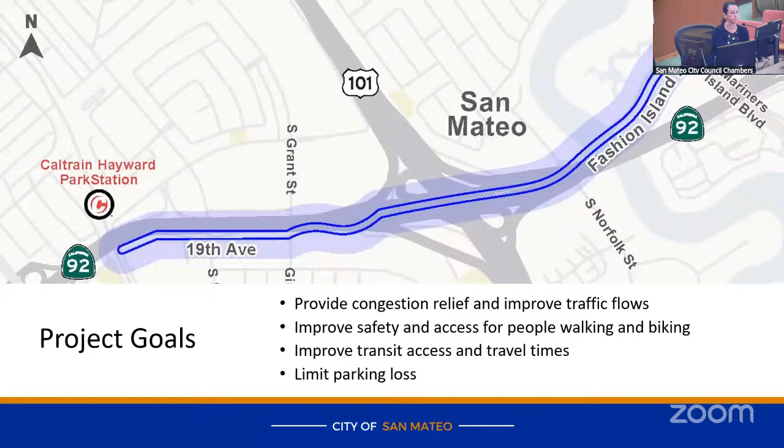For some of the project background, this project started around 2023. It was branded as the 101-92 Mobility Hub and Smart Corridor Plan. This included a Caltrans lot at the intersection of 19th Avenue and Fashion Island Boulevard, as well as this corridor. In that, we also included 3 pop-up events. We had a community meeting that collected feedback on these proposed design concepts. They were concepts at that time and more high level.

And so where we're at now is getting into the actual construction designs, getting into more detail. Again, during that time, there was an existing conditions assessment, and we had an opportunity to get feedback from the community on how to narrow this scope and how to build what scope we're looking at right now.

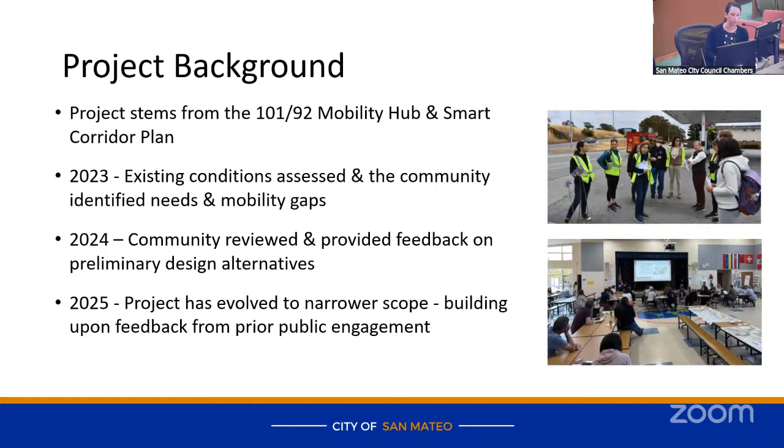I wanted to talk through really briefly some of the 2040 general plan policies and actions. This is a lot of text, we're not going to go through it all, but I do want to note that there are a lot of policies and actions in the general plan that support the type of project that we're proposing here. So the first one, about sustainable transportation, this is the very first goal in the circulation element, which is to reduce vehicle miles traveled and greenhouse gases by increasing mode share options for sustainable travel modes such as walking, biking, and public transit. There's also an additional policy to apply complete street standards.

So this is a similar vein where you're looking to increase modes when we're doing any sort of projects. Vision Zero is a policy in which we're looking to improve safety and eliminate fatal and severe injury collisions. As far as prioritizing bike and pedestrian needs, again, we're looking to prioritize that in these kinds of projects to increase connectivity and safety. And then not just about bike and ped projects, but we are looking to also maintain a transportation network here in policy C 6.2 that will accommodate future growth, reduce VMT, and equitably implement complete streets. So this is really pertaining to all modes, not just bikes, peds.

And then lastly, pertaining to transit, provide projects that will increase access to transit.

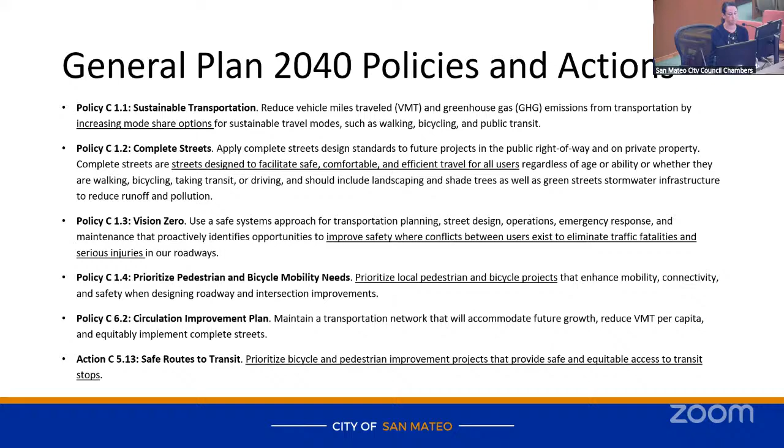We're also looking at how this project aligns with City Council priorities. In the 25-26 City Council priorities, we see alignment with this project with priority number 28, 39, and 40. 28 and 40 are largely related to the bike and ped implementation component of this project, and then 39 is related to the congestion relief component of the project.

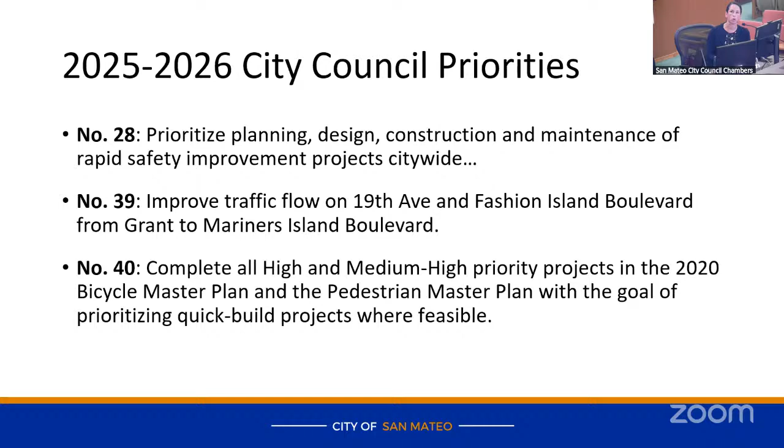Diving into some of the corridor safety data, we took a look at data from 2019 to 2024. In that, we've identified that there have been 200 collisions along this corridor, spanning all the way from Pacific to Mariners Island. 50 of those collisions, as we'll talk about in just a minute, were at the Fashion Island and Norfolk intersection. 74 of them were at the 19th Avenue and Delaware intersection.

In this corridor, there were 3 pedestrian collisions, 3 bike collisions during this timeline. I do also want to note that there was a relatively recent pedestrian fatality on this corridor as well. It's not included in this data set, but it is one that we wanted to make note of.

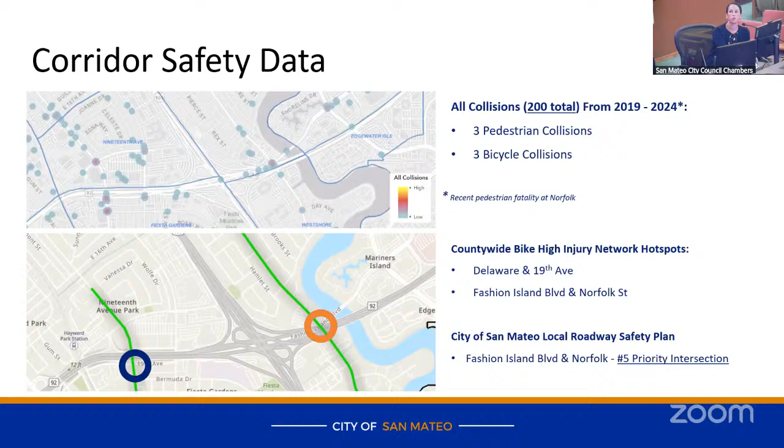Also on the corridor, countywide bike high injury network hotspots were identified at both intersections of Delaware and 19th, and Fashion Island and Norfolk. Those are the 2 that I just mentioned, having the highest amount of collisions on the corridor. And then in our own local roadway safety plan, Fashion Island and Norfolk is identified as the number 5 top priority intersection for us to address safety concerns.

Looking again at some additional data sources, the C/CAG Safe Routes to School speed analysis has identified that this corridor has reported speeding of 6 to 10 miles per hour over the posted speed limit, which poses concerns for the safety of other users along the roadway, as well as this being a corridor identified on the youth-based high injury network in a similar document.

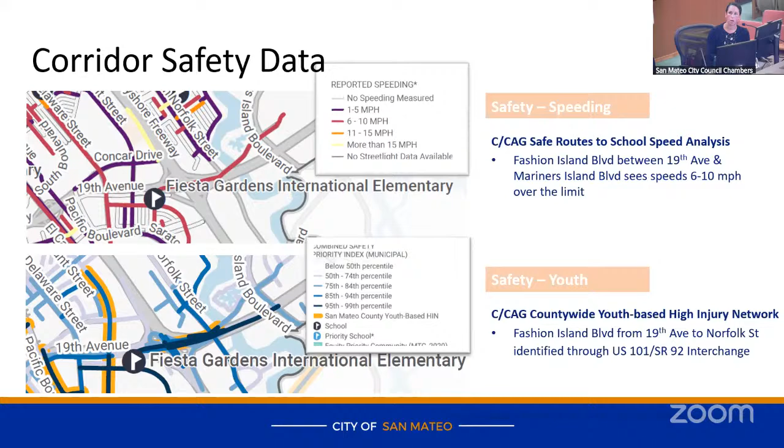Jumping broadly to the roadway network context of this corridor in relation to the entire city. The gray outline is the boundary of the city, and we're a little zoomed in from here. The yellow lines represent roadways that cross US 101. What I'm trying to identify here is the barrier that 101 has created in the community, which is probably well understood. We have 4 crossings that provide access to all modes, so vehicles, bikes, and pedestrians are able to cross 101 at these yellow points.

We also have one green crossing, which is a bike-ped bridge just north of the 3rd Avenue crossing, the Monte Diablo Bridge. And here we have Fashion Island Boulevard as this second, more southerly crossing. What we see is that it's over 1.5 miles away from the next one to the north, so it's really identified as the longest distance between crossings in the city on this northerly side, between 3rd Avenue and Fashion Island Boulevard.

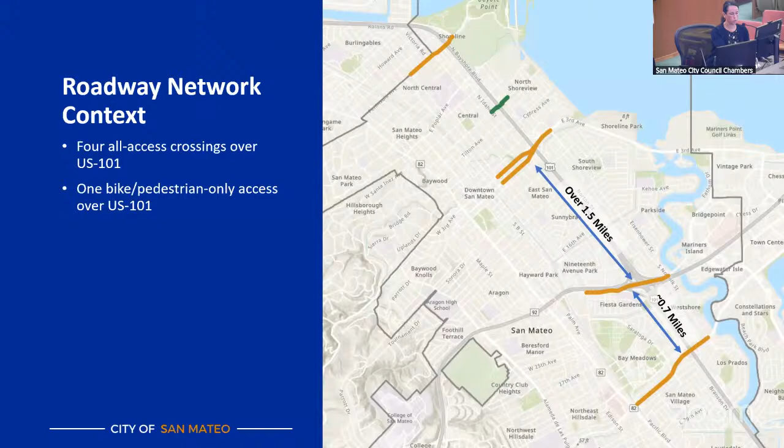To the south, it's about three-quarters of a mile, or a little less, still a decent distance. So really what this means is that these crossings become very important locations for us to focus our energy, making sure that we are accommodating all uses as best and as safely as we can, to get people across this divide.

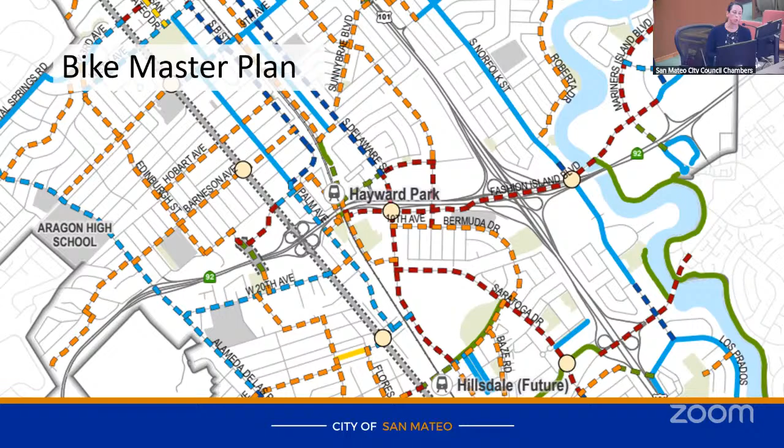So for that reason, we'll come to the bike master plan, because the bike component is a big component of this project. You'll see that the corridor I've highlighted is proposed as a separated bike lane, the highest level of protection of an on-street facility that can be proposed. Going back to that map we were just looking at, there's a reason for this: we want to make sure that these limited connections are protected and safe.

Just to make sure we're on the same page about what a separated facility is: a conventional bike lane is shown on the left. You can see there's a stripe, but no separation, so bicyclists are riding right adjacent to vehicle traffic. Typically this is acceptable on lower volume roadways, but on higher volume or higher stress roadways, a separated bike lane, shown on the right, provides some sort of vertical separation, a physical barrier between vehicles and bicyclists, enhancing the safety of that facility.

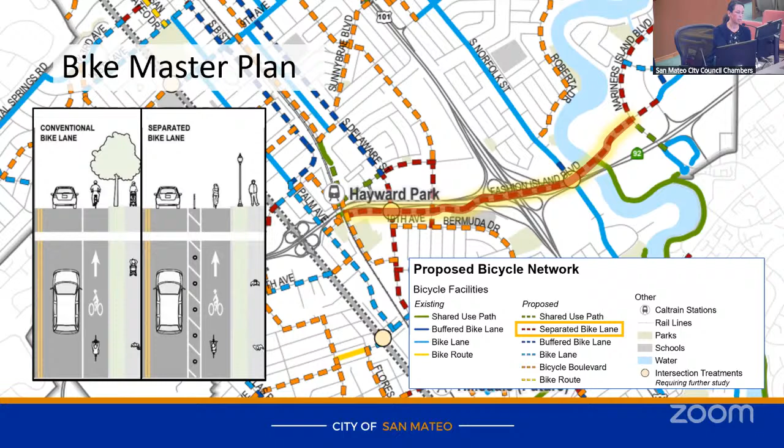We'll dive into some challenges along the corridor now as well. We're going to talk about some congestion, as well as the 92 ramps at Delaware. Both of these are topics we'll want to discuss at the end.

For corridor congestion, you may be familiar with this image, a snapshot from Google Maps of the 101-92 interchange, shown in bright red. This is traffic at 5 p.m. on a Wednesday, just a snapshot of what this looks like. We're familiar with this, as we know there's a lot of traffic headed eastbound in the afternoon. We see an inverse of this in the morning, but it's not as drastic.

One of the challenges with this corridor, even though it's hard to make out, is that it runs directly parallel to this interchange. So as people look to get through the traffic in this area, it's common for them to look for alternative routes. Being a parallel route, directly parallel, it's very enticing and gets used a lot. So this is a corridor we're well familiar with that has a lot of congestion, and this goes back to the City Council priority of wanting to see how we can address this.

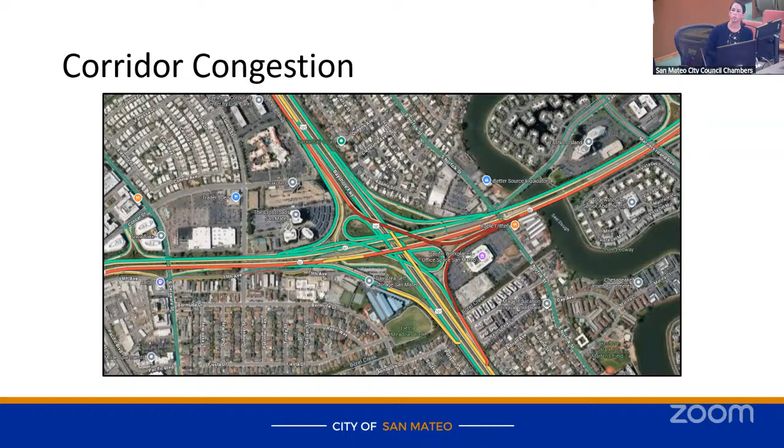So that was the qualitative review of that. Quantitatively, we wanted to bring some information about a metric we're using to address corridor-wide congestion, not just at a single intersection. What we're looking at here is vehicle hours of delay, which is the combination during this time period of how much time vehicles are not moving at free flow speeds, how much total time all vehicles on the corridor are sitting in traffic.

What we see on the corridor is broken up by different peaks during the day, and by direction. In the westbound direction, we see a relatively straight line of vehicle hours of delay throughout the entire day: 9 hours in the morning, 9 hours in the midday peak, and it jumps a little bit in the afternoon peak.

When we go to the eastbound direction, that changes a little bit. It starts at 9 hours in the morning as well, but by midday it's jumped up about 50% to 14 hours, and by the afternoon peak it's jumped over 200% to 32 vehicle hours of delay. This is every single day, 32 hours of delay of all the vehicles just waiting in traffic in this area.

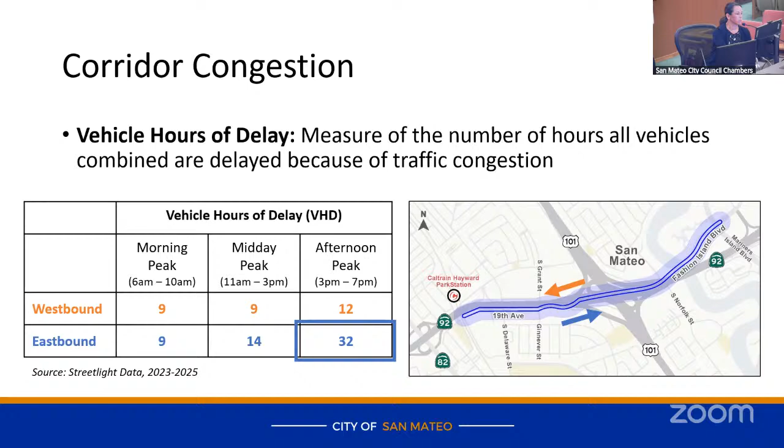Moving on to the Delaware intersection, this is again one that we're very familiar with. There's a lot of interesting movements here. This particular movement, the two ramp configuration between SR92 off-ramp and 19th Avenue, while it looks fairly benign, it actually presents a lot of challenges.

It creates some challenges in the way you would typically design an intersection. In this case, we need to design our intersections to accommodate two different right turns from one travel lane. We need to do the same thing southbound, two different left turns from one travel lane.

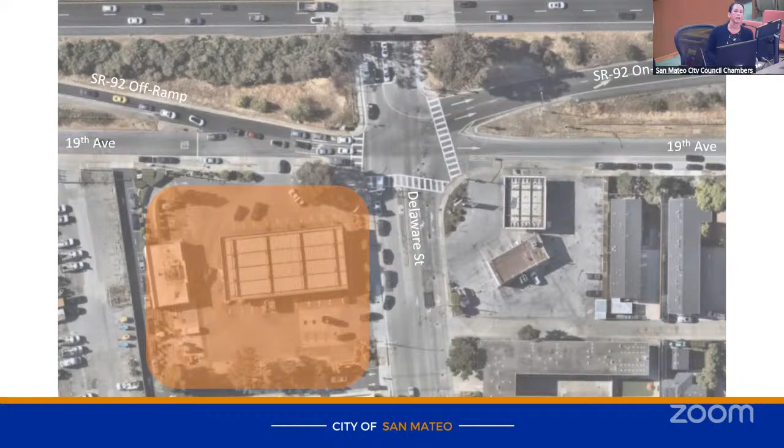We also have challenges, which we may be familiar with, from this particular gas station. This is one of the best gas stations on the peninsula, some of the best prices, great access, and it shows. We have a lot of traffic that comes in and out of this gas station, and unfortunately it's also been identified as one of the highest concerns from the community.

In this area, we know we already have vehicles coming from different areas: 19th Avenue traffic, which is relatively low volume, and the 92 off-ramp traffic, relatively high volume. Then we get into the gas station traffic, and we have these two movements occurring right in this area.

We also have challenges here on Delaware, similar issues with our typical north-south traffic, plus traffic coming in and out. We also have right turners here, but the real challenge is left turning vehicles coming out of the gas station trying to fit into an already relatively short and busy area of people turning onto the freeway or onto 19th Avenue.

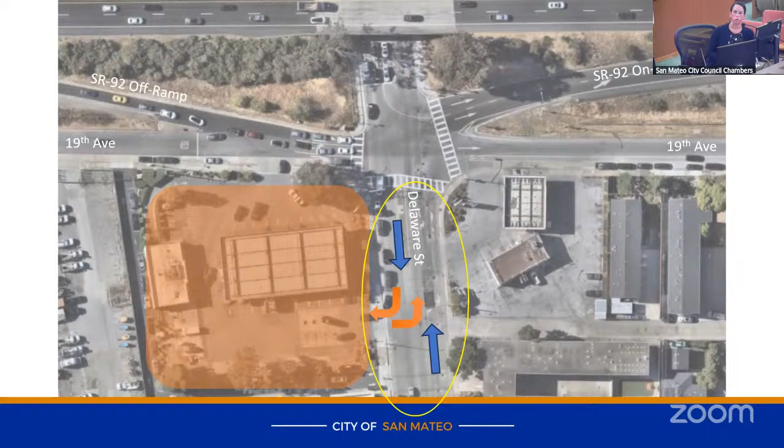All right, so we're going to jump from there right into the concept design. I'll point out a few things we're proposing to remedy some of these challenges. We're going to start at the west side of the project, at Pacific Boulevard. You'll see the tracks on the very left side, and just north of here is the Hayward Park Caltrain station, so these are the Caltrain tracks. We're starting this side of the project because we're looking to establish connectivity to the Caltrain station, and transit generally, as noted in some of the general plan priorities.

So in this, what you'll see on the bottom side, on the southerly side of 19th Avenue, is the new bike facilities that are being proposed.

You'll note that this is a little bit different than typical bike facilities. These are two-way bike facilities, and the primary reason for this is to keep westbound bike traffic away from the freeway ramps, which are a really big concern in this area. This was proposed to help alleviate that challenge. It's not atypical, just a different configuration, not as common as your typical one-way facilities.

We're also proposing to widen the roadway. It's not very obvious in this slide, but on the northerly side you can see some white lines marking the existing curb line, and we're looking to widen out so that we can maintain as much parking as possible through this area. We are going to lose a handful of spaces. There's an existing 37 parking spaces here, and through this design we're looking to maintain 28 of them, accommodated by widening the roadway.

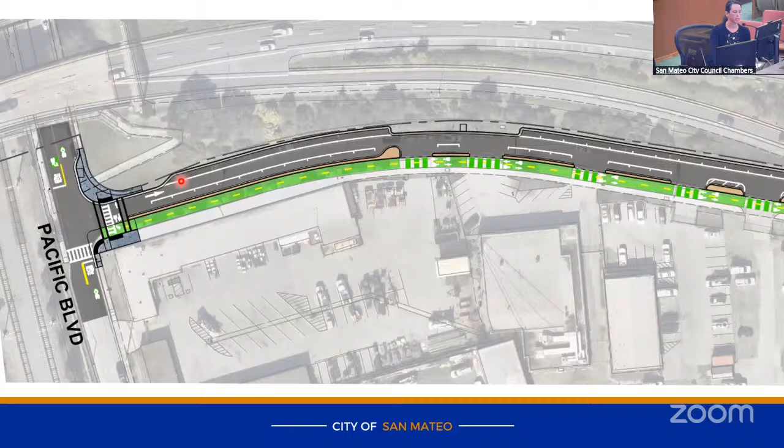There's a section here that's actually used for Samtrans bus layovers, and we're looking to maintain that. We're working with Samtrans to make sure that facility accommodates it.

Moving on to Delaware, this is that big intersection, and you'll see we don't have a lot of detail here yet. The primary reason is that this is an early design, about 35% design, still relatively concept level. We'd heard qualitatively from the community that there were a lot of challenges with the gas station intersection, so rather than diving into what we think is best, we wanted to hear from the community and confirm what we were hearing generally, that this is a concern.

When we got feedback from our online survey, this driveway on 19th Avenue in particular was listed as the top concern out of 5 or 6 different options we had given. One thing I want to point out is the primary solution we're proposing for the 19th Avenue portion is this proposed new median, which we're looking to extend from the off-ramp all the way out towards the intersection. You can see that here.

We anticipate that this will help alleviate some of the challenges in this area, specifically the safety-related challenges tied to the congestion or collisions happening here. We are anticipating still being able to provide the same amount and type of movements that are currently allowed at the intersection as it is today.

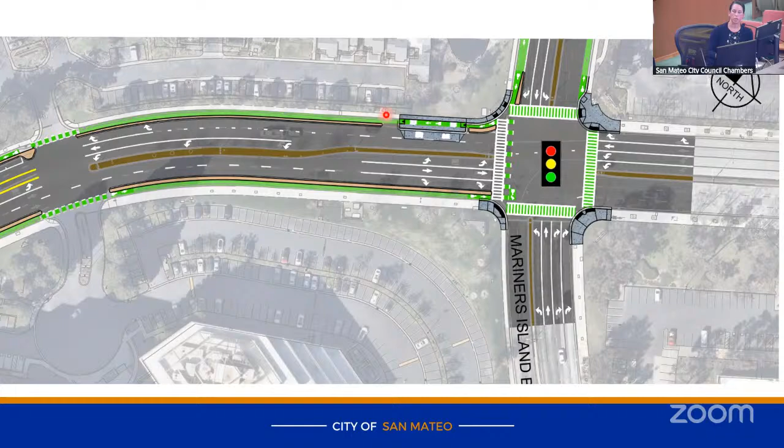They're a relatively new treatment, not something we've used here in the city, but we've seen it in other places in the Bay Area. One of the other things we're incorporating in this project is a new bus loading island. There's a bus pad out here for people to load, the bike lanes go behind the bus pad, and the buses can stop in lane here.

All right, moving on to outreach.

We also used social media platforms, and we put out A-frames, those construction-style frames, along the corridor and at community areas. We put them at Trader Joe's, the Hayward Park Caltrain Station, Fiesta Meadows, and other places where we knew the community who typically uses this corridor would see them.

In terms of participation, we had about 50 attendees at the community workshop, and over 150 responses on the online survey, which ran for about a month.

Going through a few interesting pieces from the outreach, I wanted to share an interesting parallel between the online survey and the workshop. Most people identified that the primary trips they're taking are short trips, and you can see that the blue and orange, representing online survey versus workshop, are largely the same all the way through.

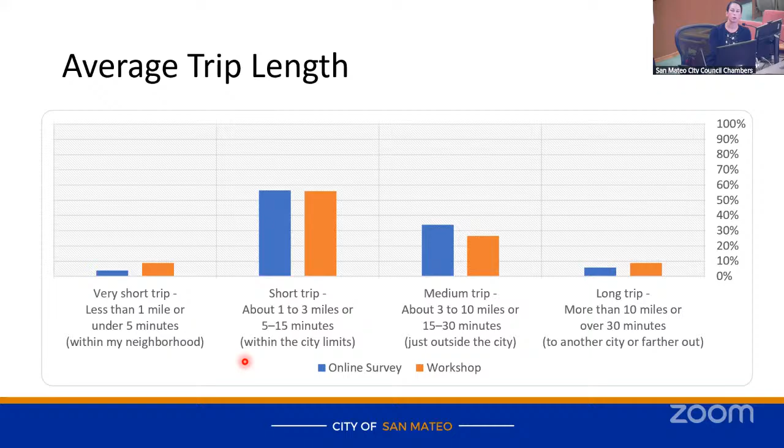There's also these medium trips, 3 to 10 miles or 15 to 30 minutes. The main reason I wanted to note this is because these numbers, the 1 to 3 miles or 3 to 10 miles, tend to align with the higher propensity trips to shift to other modes. These short trips are really prone to using something like a bike, showing an opportunity to shift the highest amount of trips if we improve the bike facilities through here.

During the workshop, we also heard a lot of really strong support for the various improvements we're proposing, including the sidewalk gap closure. There's currently about a 2-foot sidewalk on the south side of the Seal Slough Bridge, so providing a widened sidewalk on that southerly side was something that would be welcome. The protected intersections and protected lanes also tend to receive very good feedback.

There was definitely some concern about the one-way versus two-way transition - that's the one I talked to you guys about at the YMCA parking lot, that we're considering moving down to Grant. The traffic flow and congestion was definitely something we heard a lot about.

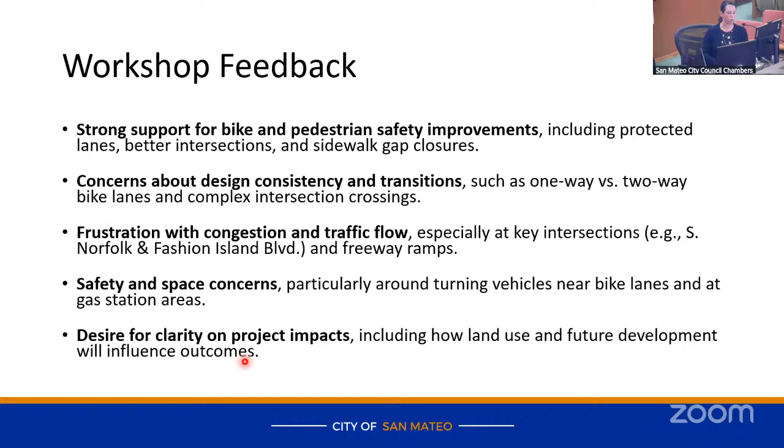The purpose of this first community meeting was to talk about the concept designs. We didn't have the traffic analysis just yet, so we'll be talking about that at the next one. We also want to make sure other future developments in the area are included in any of the analysis moving forward, which they will be.

We also received pretty decent support for the switch to 2 eastbound lanes and 1 westbound lane across the bridge. A lot of that was primarily neutral - it didn't seem like people had a strong decision either way, but where we did get support, it tended to outweigh anything that opposed it.

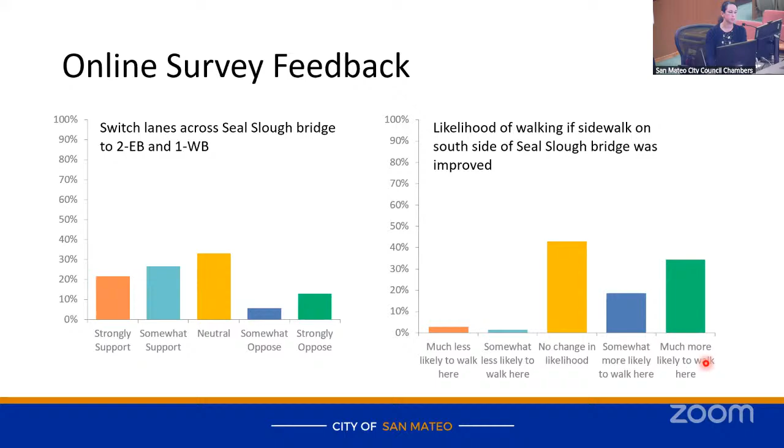We also asked about any increase in propensity to walk if we were to improve that south side sidewalk, and we do see that a lot of respondents said they were much more likely to walk here if that sidewalk was improved.

Moving on, I wanted to talk about the funding strategy for this project. One of the challenges with this type of project, primarily the congestion relief components, is that there aren't a lot of funding opportunities these days for congestion relief projects. Big dollar congestion relief projects tend to be in the form of freeway congestion relief - you're not really finding a lot of funding opportunities for local roadway congestion relief projects.

When we're looking at how to fund a project like this, we need to look at where the dollars actually are. The dollars are actually in complete streets projects, safety projects, bike and ped projects. As we've been looking through this corridor, we do have an ability to improve the facilities we're proposing with our protected bike facilities, and being able to improve safety along the corridor.

The good thing we have going for us is that a lot of the changes we're proposing with those types of facilities also happen to align with the ability to improve or address congestion in different ways. We're looking at similar analysis, similar numbers, so we can have an output that addresses both types of challenges. As we look to complete these large projects, we need to include multimodal elements, safety, and congestion relief elements.

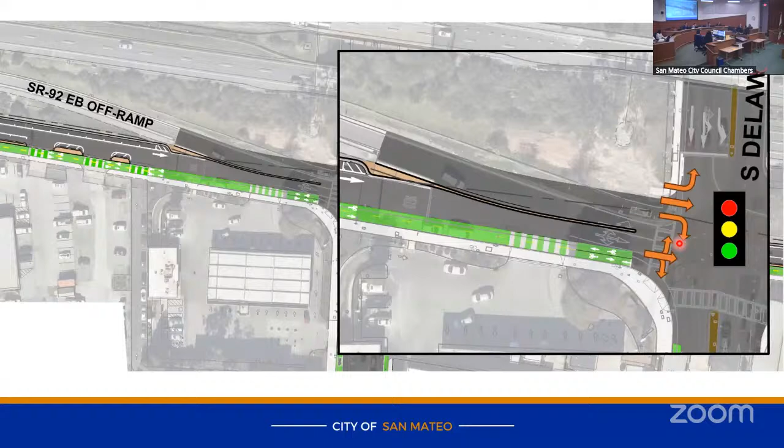Did you do a traffic analysis of what may happen on that right turn on Delaware into the gas station? No, it's not really typical that we would do a traffic analysis of a site specifically. It's not that we're not looking at what the site operations are, but we recognize that we will see additional traffic coming southbound and through here.

Looking at this at a high level, the amount of traffic coming in here right now is both inbound and outbound, so I can foresee there being more streamlined movements, with all the direction of traffic flow being in a clockwise manner, rather than both counterclockwise and clockwise traffic coming in and out. So again, we don't have analysis on the operations of that site, but we're anticipating that folks will come down Delaware to get in there.

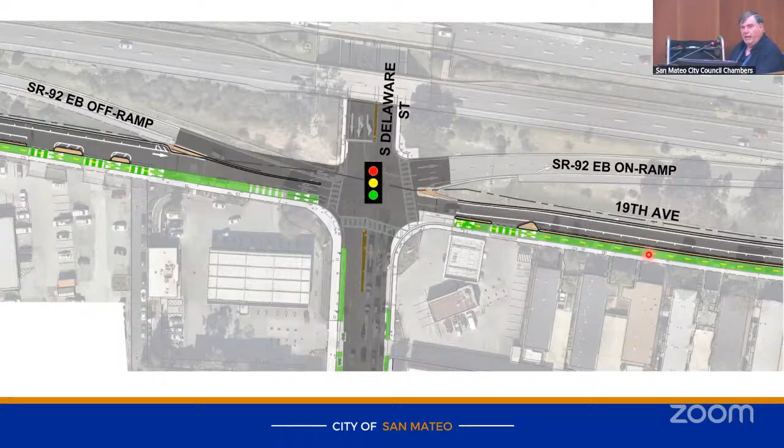I see, okay. So a little bit further down, not right even there, if we could scope out a bit, does it make sense to approach the YMCA about putting the bike lane under those bridge supports, or bents as they're called, to get the bike lane even further away from the roadway, so it's not at all close? It would be cheaper to build, and it would definitely provide great separation.

You'd be away from the cars. Does that make any sense? So just so that I'm understanding, what side are you referring to? Can I use this? Oh yeah, I always want to ask.

So where is the YMCA? It's out this way. So if we took this... of course, now it doesn't work. So if you look at the upper area where your cursor is right now, if we were to create a bike lane on the other side of the supports of the bents, can you scope out on that, or go to the next map, west?

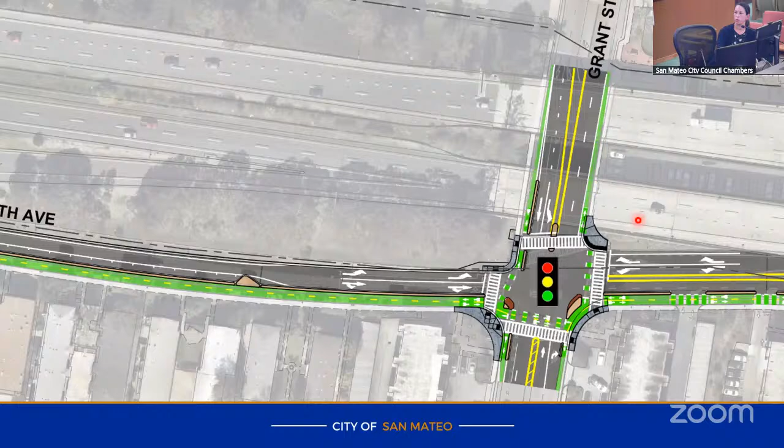Yeah, I mean, I go to the Y, I've seen what it looks like, and it's a pretty expansive area. There's no cars parked there, it's concrete, and the supports are kind of in the way. Is that something you've investigated? Would it help? We have not investigated it. I'm not saying that it wouldn't help.

The primary challenge through this area has to do with a lot of the Caltrans right of way constraints. One of the things I've come to understand going through this project is who has agreements with whom. The city has agreements with Caltrans for the roadway operations in this area. This property owner has a maintenance agreement with Caltrans for the use of the street level part under the bridge, for instance. So we would need to work through Caltrans and probably this property owner if we had an interest in doing that. Again, not a part of the scope of this project, but certainly an interesting consideration.

Okay, so a little bit further east, trying to do this from memory. So the bike lane would be on both sides of 19th, even approaching the 101 North entrance, because that is super dangerous. I drive there daily, and I've seen so many close calls. Because of the long sweeping turn that goes on to 101 North, people pick up speed, then they don't need to scrub the speed off. And it makes it more dangerous because of the delta speed for the bicyclist versus the car.

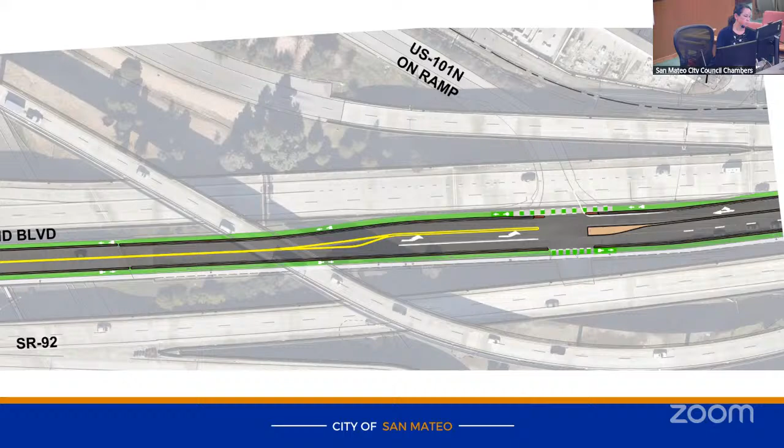Okay, so a little bit further east at Norfolk and 19th, there's an intersection. I've seen this frequently in Canada, in Vancouver and Montreal, where there's a diagonal bike lane: when the eastbound traffic is turning south and the westbound traffic is turning north, and there's no cross traffic, the diagonal would be open. Is that something you might consider, to make a diagonal crossing controlled by a walk signal or a ride signal? Would that be something you could think of that would work?

So tell me one more time the directions, just so that I understand. So if you go over to where right there, go a little bit further east, stop there, and go diagonal across the intersection to there, make that a bike lane, and it would be green, have lights on it. So when the people are turning like this, the center section is open. I've seen it in Canada quite a bit. Other countries also, Hong Kong's got it, and it seems to work.

I don't know if that's something we don't do in the US. Yeah, it's not something that we would typically do.

One of the other things to note about this intersection is that there are a lot of right turning vehicles. Part of how we're looking to facilitate those right turning vehicles is implementing right turn overlaps. When there's a corresponding left turn going on, like a northbound left turn, we'd also have a corresponding right turn, right on red, eastbound right turn arrow, which helps facilitate additional right turn volume through the intersection. That's not a limitation of this proposal, but just something to consider since we have a lot of that volume, and also a lot of east-west volume, so it's difficult to hold all of that while we have those crossings.

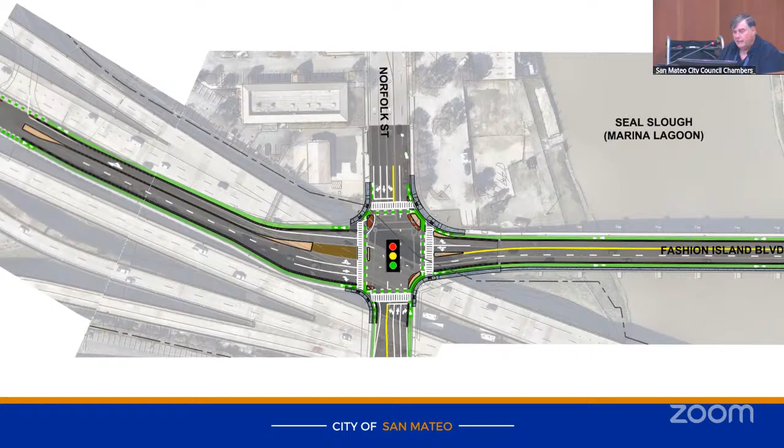Okay, and very last, if we go onto the Fashion Island Bridge, the Seal Slough Bridge, I can see in your drawing the seismic retrofits done about 20-something years ago, almost like the cathedral at Notre Dame, the flying buttress construction technique, the exoskeleton. Is that what you're talking about? Perhaps utilizing that to put some sort of pedestrian roadway or pedway?

No, not necessarily. We were looking to see if there was an opportunity to add actual sidewalk onto the existing bridge deck, not off the side of it - not a cantilever, but on the actual existing bridge deck surface. Potentially seeing if there was an opportunity to dowel in a new concrete surface. But we're not going to be able to do that due to the weight of the concrete, and I think any potential additions to the bridge at this point will need to be looked at with higher scrutiny because of those challenges.

Got it. Have you considered a lighter material? I think we're looking at all options right now. Okay, well, thanks for the presentation. It was incredibly informative.

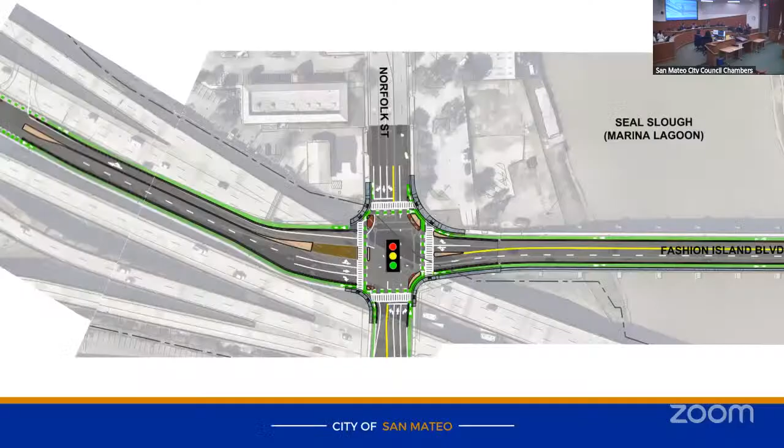Just one thing to note, bringing up one of the funding slides - so far we've secured around $9 million of funding, and we're still looking to secure additional funding to get up to what we currently forecast the project to be estimated, around $26 million. We're going to be pursuing Transportation Authority highway funding. So even though it sounds like a large dollar amount, we have to keep our work modest. Sidewalk can get quite expensive, and as we add different design elements and scope, it increases that dollar amount. So we're working on securing funding to deliver the project, but we still have quite a shortfall in the project cost, so we haven't been able to add additional elements like sidewalk to the project at this point.

Great, okay, thank you, and I will get to the cost part.

Let's transition to that now. So in terms of the parking spaces, there were 64 parking spaces along this project corridor, of which we're preserving 43 of those spaces with this design, this 35% design.

One of the things noted in the reading was that we're choosing a design with widening, which I assume is pretty costly, and it's actually noted in the reading that it was pretty costly, but that was mostly to preserve parking. So I was curious, of the $25 million budget, how much is associated with the widening in relation to those 43 parking spaces? I don't have the breakdown of that dollar amount at this point, but it's certainly something we can get, because I think that's where the city council should be weighing in on the policy choices we're making.

If the city council is saying 43 spaces along this corridor warrants widening, but sidewalks do not, that is at their discretion—they are our elected leaders. But I do think that is actually a very linchpin issue they should be talking about at their city council meeting, and I hope members of the public bring it up to them at that time as well.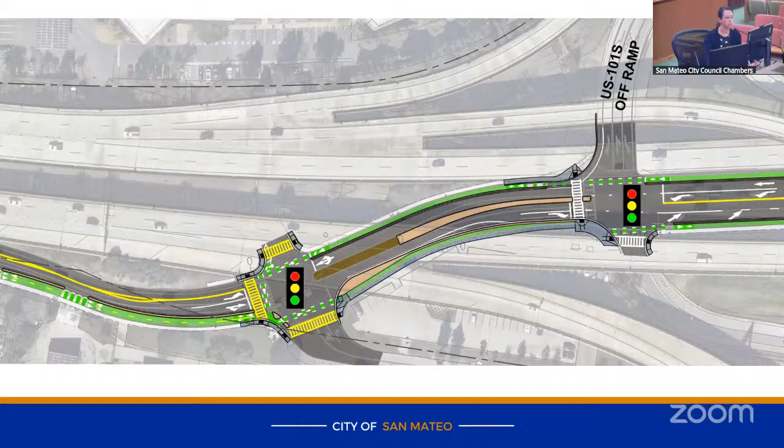So at this location, this is where there's a potential for a lane reduction of the existing turn lane. There's an existing left turn lane here. Right now there's not a lot of turning volume going into that left turn lane, which is one of the reasons we've considered this. But the primary reason is because of these column locations—I apologize that not all of the freeway columns are shown here, but this particular area tends to be the most constrained due to the freeway columns in the area.

And so on this side we had an ability to widen—are you using your laser? Sorry, there it is. I thought I was. Sorry, there it is. Okay.

So I was saying that in this area, it's the most constrained area due to the freeway columns. You can see the freeway coming through here—there's one in this area, there's one here, and there's a few more, I believe. Because of this, we had to look for alternative ways to facilitate the bike lanes in this area. This is the reason the bike lane in the eastbound direction was being proposed to be jumped up onto the sidewalk, because there wasn't enough room to accommodate the bike lane and the travel lane while also retaining some of the turn lanes in this direction.

In the westbound direction, we did not have that opportunity to widen onto the sidewalk. A lot of this has to do with the property agreement we were talking about—this is, in fact, private property, and they have an agreement with Caltrans for the use of this space. So that was not an option for us in this area, and that's where we did have to look to reduce the turn lane.

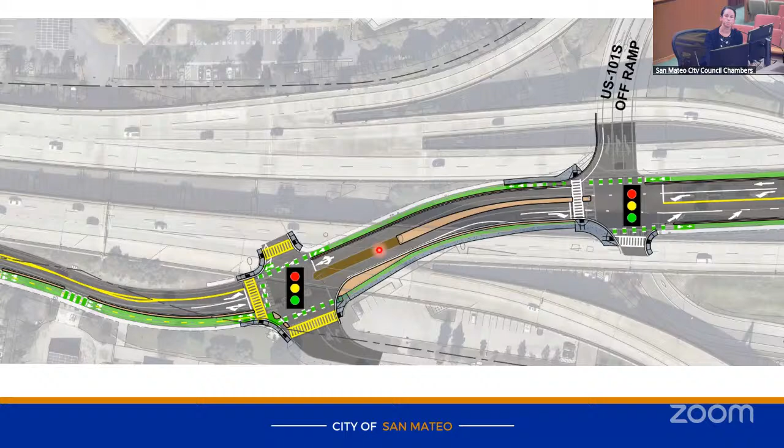Okay, thank you. And for the bike lane jumping onto the sidewalk—that sidewalk currently is narrow and it would be widened in order to do that, so you don't lose pedestrian footage? No. Okay, thank you.

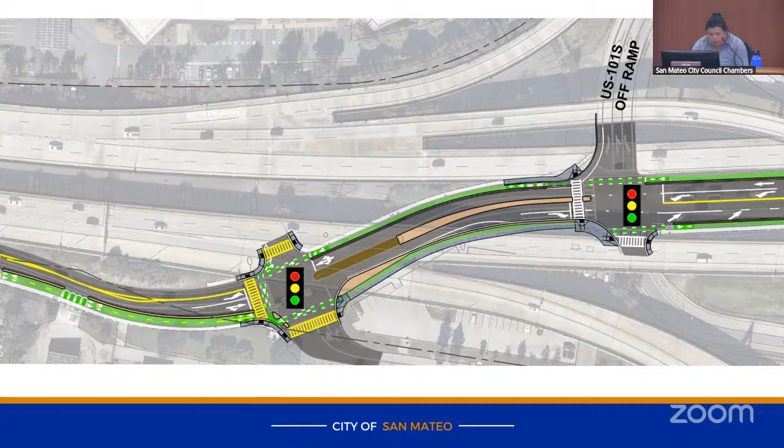Let's go over to that $250K of traffic congestion mitigation funding. That was very fascinating to learn about in the public comment. Thank you so much to the public commenters for bringing it to our attention.

So has there been a consultative process with stakeholders on spending that $250? I think there has not been. And I don't know, Matt, if you want to provide any feedback on that? No, I don't think there's been a process.

When we get these congestion mitigation funds, they go into a pot that's intended to deal with congestion mitigation. So these funds were intended to deal with, as the public has talked about, the issues at the Norfolk intersection, is my understanding. And those are part of the $500,000 of matching funds we've put towards this, with the intentional purpose that those funds were for the congestion relief aspects. As Bethany indicated at the beginning, this used to be two projects that got combined into one.

We had our Norfolk intersection improvements project, and then the smart corridor mobility hub, and those got combined into one. So those funds have been put into this project as part of the matching funds going towards the congestion mitigation pieces. Those funds are going towards what they were intended for. It's just that the congestion mitigation aspects, when you add up all the stuff being done from a congestion mitigation standpoint out of the $25 million, is probably multiple millions, and Bethany could talk about that. So there are multiple millions of dollars going into congestion relief aspects of this project, but it's also lumped in with all the multimodal pieces. So the money collected from the developer is going towards its intended use in terms of addressing congestion at that intersection at Norfolk.

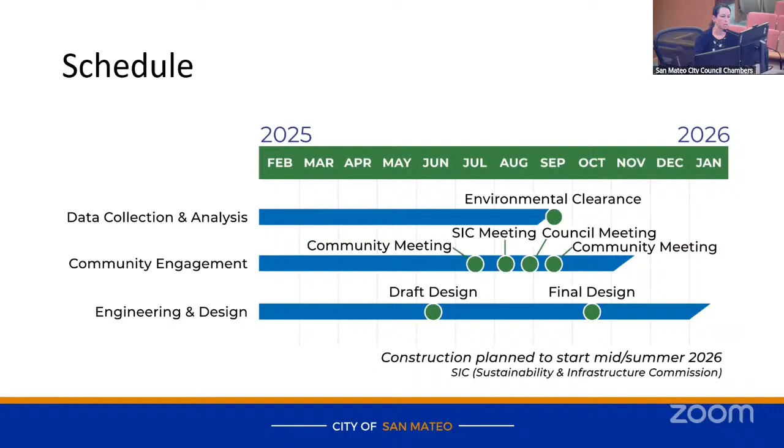That's in the westerly section where the parking is going to change as well. Then on the east side, just east of the Seal Slough Bridge, there is some parking that's lost. There's additional history there I don't fully have, but there have been challenges with one of the businesses on the south side. Prior to them building a parking structure, there used to be heavy usage of the on-street spaces. That's no longer the case since they've built that parking structure. The primary use for that parking right now, I think, is for access to the trail.

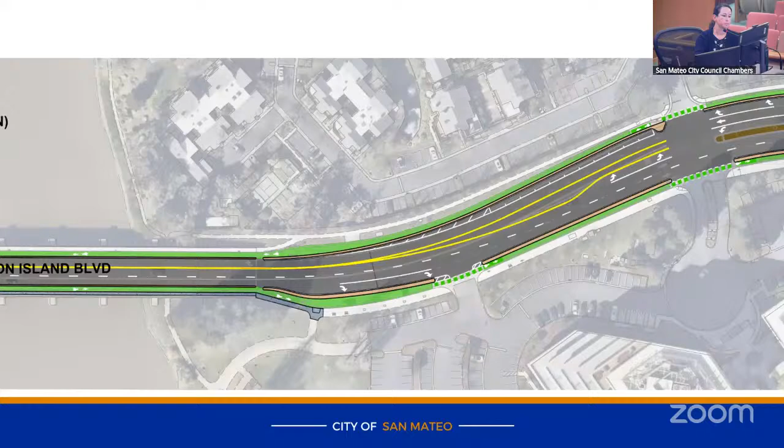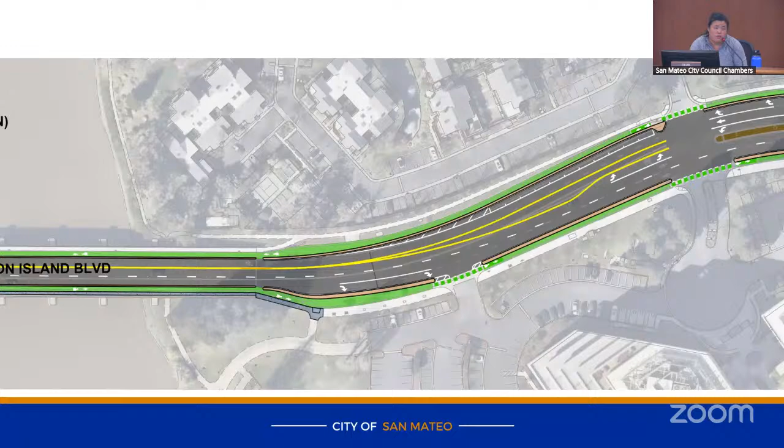Okay, thank you, and just last question on money. So essentially what I'm hearing from your presentation, Bethany, is that we either do a multimodal project in this area, or we just don't do anything at all, given the state of where money is coming from. Some public commenters want just traffic mitigation or congestion alleviation and no bike lane whatsoever, but given the type of money available through these government grants, I'm not hearing that as a feasible option.

Is that accurate? I think the alternative is for the city to self-fund. For the amount of money we're putting into this right now, the benefit we're getting in terms of multimodal benefits as well as congestion benefits is why we're suggesting this is a worthwhile pursuit. There is an option for the city to self-fund, but that would be multiple millions of dollars, not grant funding, to address congestion relief only, and we may not get the other safety and multimodal benefits we're proposing with the project.

Okay, great, thank you, so that concludes my questions. Anyone else have any clarifying questions before we move into comments? Okay, great, who would like to start on last round comments? Great, Commissioner Renaud.

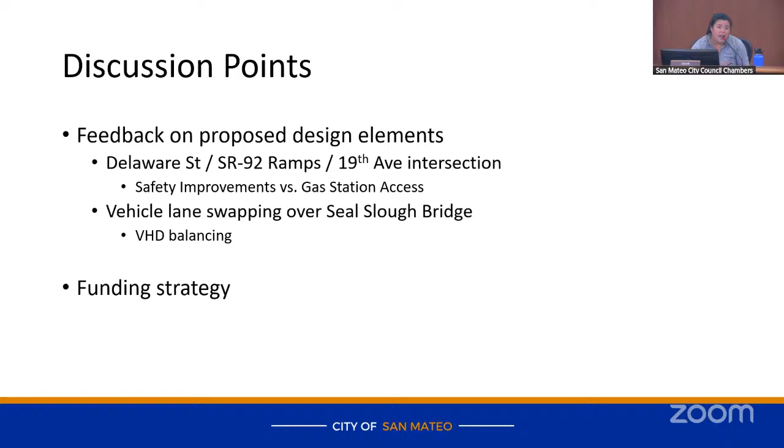I think what happens is the team is so capable of showing the results, but what people want to know is the work, and where have they been heard, and where have things been adjusted for that feedback. There was thought that we weren't consulted for traffic mitigation, but in fact you were. So there's things like that I think are important to reinforce, because that's how one continues to build trust with residents, rather than just going to the results, just the design.

So to me, that process part really matters. Thank you so much for unwinding and detailing that during the Q&A. In terms of the merits of the project, I support the project.

Overall in broad strokes, I remain interested to see how things will be adjusted between 35 and 65%. I think that traffic evaluation is going to pull a lot of weight in informing that, and I'm very curious about the evolution accordingly. So that's another communications opportunity for the public at that next community meeting. Will it be ready by City Council too? So in whatever you present to City Council, really demonstrate how all of these pieces of data inform the design and evolve the design.

I remain very deeply skeptical of widening the streets for parking. That sounds like a really bad PR move. If you have a $25 million project and you're widening the streets for 43 spaces and not having sidewalk, that is just something that could be written up in a really awful way by some blogger or news article. That's just not what we need in our city. And that's not true even in terms of what we're trying to do - the funding is for complete streets, not complete intersections. We need to think about that more concertedly.